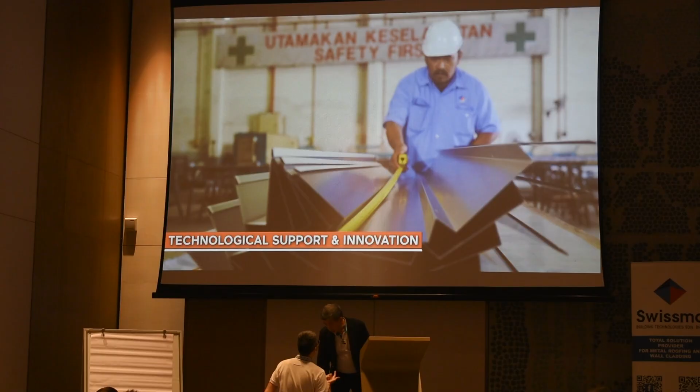In the still rapidly developing nation, new buildings sprout each day as a sign of advancement of society, both in technology and aesthetic. Swissma has been leading the total solutions provider for roofing and wall cladding in Malaysia. Equipped with the highest technological support and innovation, our team put great care in our work. Aiming for total customer satisfaction by advanced research and fulfilling the needs of our clients, Swissma guarantees everlasting returns for stakeholders, while also providing precision manufacturing along with customized fabrication, creating endless possibilities.

Our services include on-site production, providing installation training, craftsmanship quality, engineering and R&D, technical and architectural consultation, receiving multiple award-winning titles such as the Brand Laureate Best Brands Award 2015-2016, Sin Chew Business Excellence Awards 2016, the Brand Laureate Best Brands Award 2016-2017, the Brand Laureate Best Brands Award 2017-2018.

Swissma offers sustainable customized solutions using different materials such as aluminium, stainless steel, copper, titanium zinc, TPO PVC membrane that is FM approved. Most importantly, working in strategic partnership with NS BlueScope Malaysia for solutions in color bonded steel. Also not limited to specialized projects being public amenities and infrastructure, commercial buildings, industrial buildings, residentials.

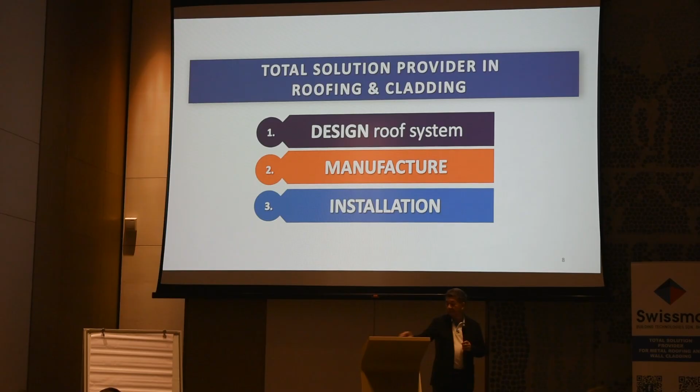Before we design the roof system, I think most importantly, we need to know the project requirements. We have to understand what the project needs. This will be one of the key elements in most projects now - the U value, the thermal insulation. Later on I will share with you the UBBL Clause 38A requirements. Previously, this doesn't take center stage, a lot of insulation was just nominal. Today, I think projects are getting more sophisticated. There are some thermal requirements that are even more stringent than the mandatory requirements.

So then again, we are able to customize the roof system to meet acoustic value. Let's say a convention center, lecture halls, hospital or whatever, where there is a specific acoustic requirement, we can customize the roof to meet the STC value. We have the software. Oops, bit of technical hiccup.

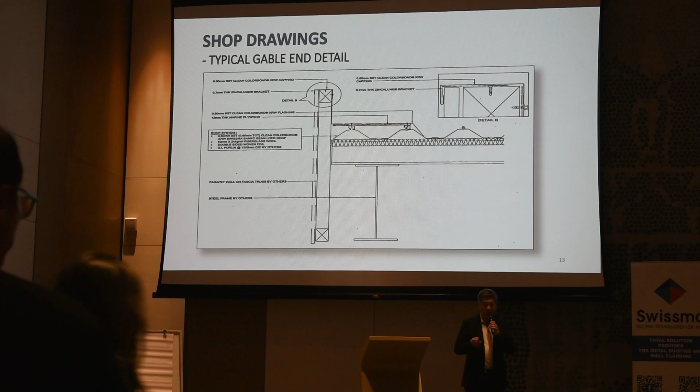This gutter downpipe sizing, we also use software to do the sizing. Then, of course, most importantly, as an architect, the shop drawings - whether the project is well executed or not, I think this is quite fundamental. If you don't provide the details, don't expect contractors to know what to do, and they'll use their own standards. When things happen, who is right, who is wrong - their practice versus your standards. But if you don't have drawings, there is no standard to refer to, unless you ask them to submit shop drawings for approval, which I do encourage, because that's where you are in control. So we can provide shop drawings.

Once we understand your project requirements, we customize the roof. Customizing the roof isn't just about the layering of components, it's also selecting the right profiles due to your project needs, maybe long length, low pitch, or a 3D geometry design.

As a company, we provide a very wide range of materials for your selection, from color-bond steel down to TPO membrane, and in between, even pure titanium. I'm still looking for a project that will be interested. Titanium zinc, yes, we have done in Penang as well.

When it comes to coated steel, we work with NS BlueScope as a strategic business partner. We only sell BlueScope coated steel. Why? Because, as you can see from the earlier slides, we sell quality solutions. I think in coated steel, BlueScope has exhibited their quality over the years, and they are also the leader in the market for coated steel.

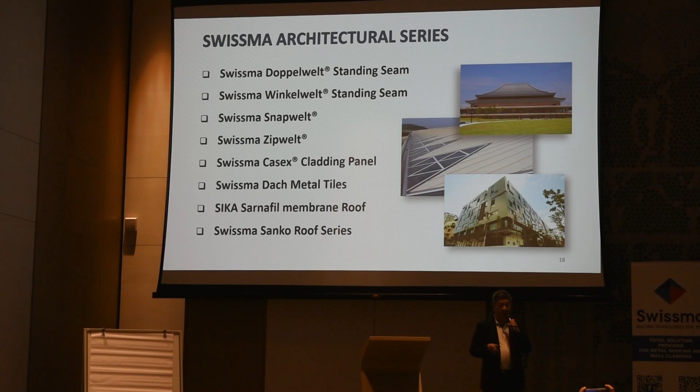As a company, we provide the widest range of products, I would say. We've separated into two categories. One we call the architectural series, where we have the Doppelwelt standing seam, Winkelwelt, Snapwelt, Zipwelt, even Casex cladding, metal tiles, membrane, and next we have our Sanko roof series.

Before I move to the Sanko series, this Doppelwelt standing seam - we are one of the pioneers to introduce this in the market. It's a very European system. Malaysia used to have metal roofing introduced from Australia in the early days, so the clip lock type roof was one of the earlier metal roofs in the market. But standing seam, we introduced it - it's a very European profile.

I always say, like in a restaurant last night, we were looking at the menu and always ask the captain, what's your signature dish? So this is our Swissma signature profile. Why? Because this is the most versatile profile - it can do all shapes. Only this profile can do all shapes, like this.

On the right hand side, that is a Penang project. That's a Penang swimming club done in titanium zinc. You can see the complexity of the design.

The other category is called the Sanko series. Sanko is a Japanese brand. Sanko Japan is our partner, so is Nippon Steel Japan. This product, Sanko, has been in Malaysia since 1974.

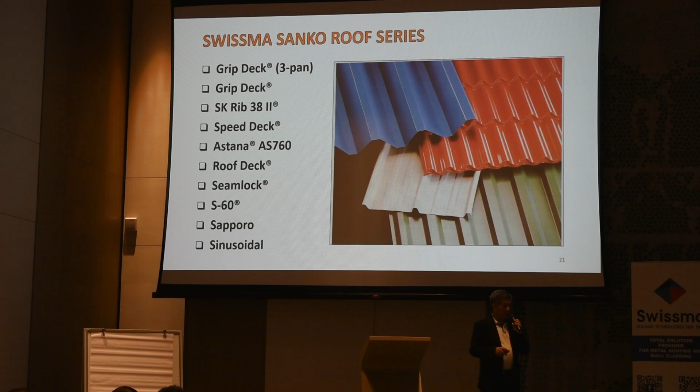And you can see there's a wide range. I will not go into all the products, I'll just mention this - the clip lock profile, which is the most sellable. We call it Grip Deck 3-pan.

Just want to touch base - this is a very Japanese system, we call it the Sanko seam lock roof. Some of the audience here has already done projects using this profile. It's a very robust, deep corrugation profile, so it can go on very low pitch. Example, even 1 degree, you can go up to 200 meters, because of the deep corrugation.

And this is a concealed fix again, widely used in Japan - a very common system because it's very good against strong wind uplift in countries like Japan. So this is how the seam lock is installed, using a motorized seamer, so it's very, very secure and completely leak-proof.

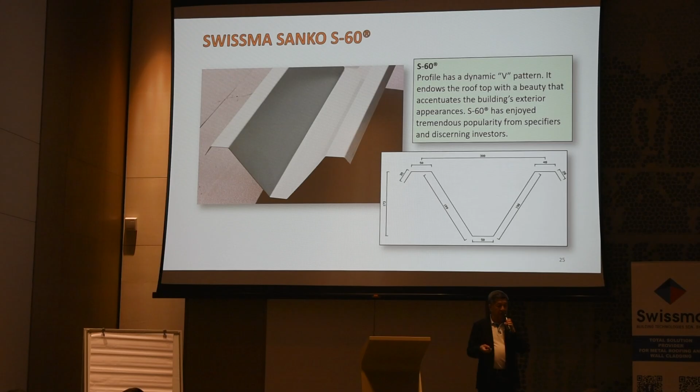We also have another very deep corrugation profile - it looks like a gutter actually. This profile's unique strength is due to its high section modulus, which is the inherent strength of the profile. It can go on a purlin spacing of even up to 11 meters, but the thickness is of course not 0.42, it's like 1mm or 1.2.

So when you have a project like this hall, for example, with no false ceiling, you don't want to see the purlins like in a factory or warehouse. Then you can design your steel structure to look very neat - so it doesn't look like a warehouse or factory. This is where it can come into play.

Lastly, I'll just showcase some of the projects we have done. I think this is a design tender we bid as a domestic subcontractor, which is using the standing seam. This is where the next highlight will be, shared by architect Ryan Tan - Sama Square, an award-winning project.

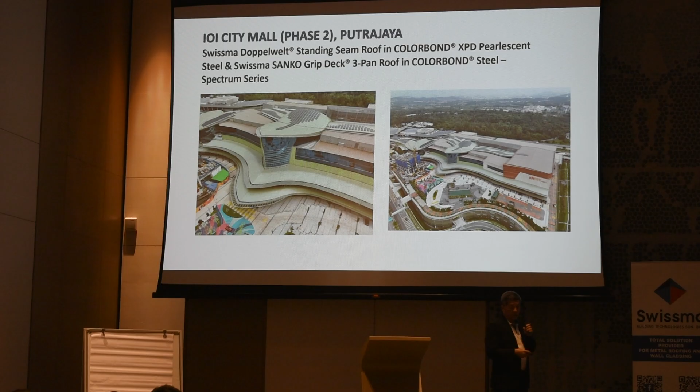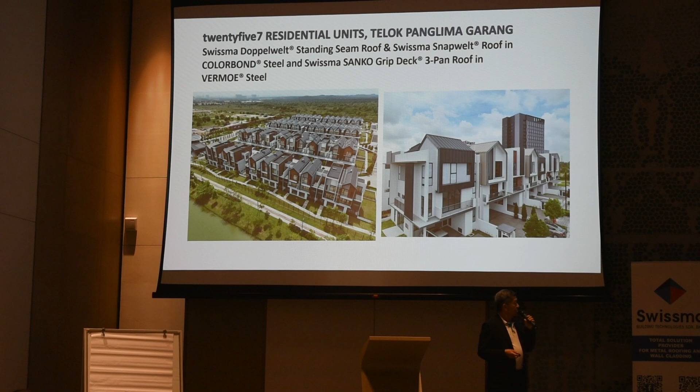This is a private bungalow - like I said, standing seam can do any geometry. So this is another modern bungalow. Mass housing in standing seam. Again, some other images - the A shape of the barn house design is now very popular.

Hangar, next. The hangar project phase 2 is now on tender. This hangar - when you see hangar it means very wide span, very long length. So this is the C-block profile that was completed.

This is Ferrotech, home base here. This was also challenging in the sense that it was very fast track in nature. But it's completed.

This is another project by Sime Darby, now they've sold it to Seming. Now in KL it's very popular to build multi-story warehouses, and I think that will come to the next state as well. Sime Darby is very into it. This is Logos, the warehouse - it's 40, 50, up to 60 meters tall, multi-story.

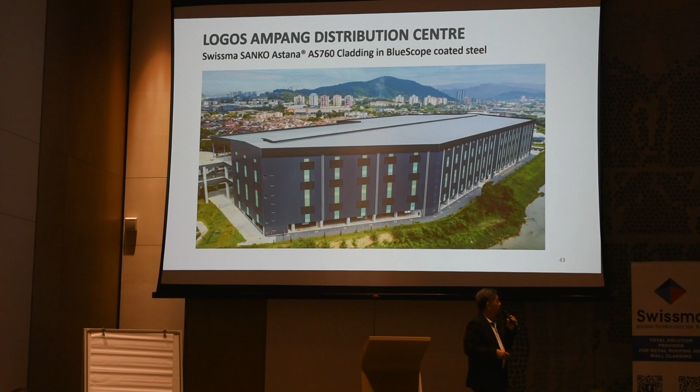So this is another typical factory with a lot of skylights. Again, this was the first Logos warehouse in Kuala Lumpur, and currently we are supplying a lot to this kind of light industry in KL for Sime Darby.

And that's all for a brief introduction of Swissma. Now I'll move on to the topic for this morning.

Okay, the content: I'll be sharing with you some customized cladding system to meet UBBL Clause 38A. I'm sure all of you are already doing project compliance because it's mandatory. What I'm going to share is the construction method, and how, just to give you some basic knowledge, you can develop your system to meet the U value. Then I'll be sharing on oil canning, something you're familiar with, and flashing, detailing, and use of proper tools. And lastly, customized shop drawings, sharing some nice shop drawings.

Okay, let's move on. UBBL Clause 38A - it started with MS 1525, alright? I think Penang State was always very advanced compared to other states. When it was at 1525, I think the Penang State government already adopted the U value, though that was not mandatory then. Before 2680 came out for residential, and of course now it has evolved and been adopted in UBBL, which becomes mandatory throughout the country.

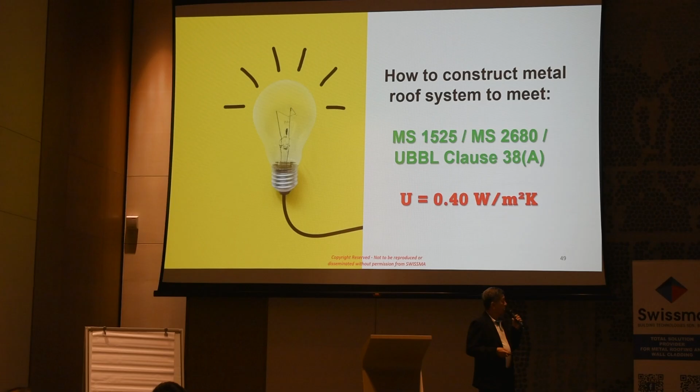So this is an extract of the UBBL Clause 38A, which I'm sure you're all familiar with, and actually it's a very simple calculation. I'm just sharing - it sounds like a big deal, U value, but if you break it down, this is a simple formula. So K is thermal conductivity. Again, loose connection, sorry for that.

Yeah, so just quick sharing - you can also sometimes do your own checking. So K is thermal conductivity, which is a material property, which I'll show you. The thermal resistance R value is actually the material thickness over K, and the U value that you're supposed to comply with, which is the thermal transmittance, is 1 over R. The higher the R, the lower the U, okay?

So this example of the K value - this is fiberglass wool, published in their material catalogs. For example, here is a 16 kg density, 50 mm thick, shown there. So the K value is 0.0366. That's the value you plug in when you do your calculation. Next, that's the rock wool - the value is quite similar, right?

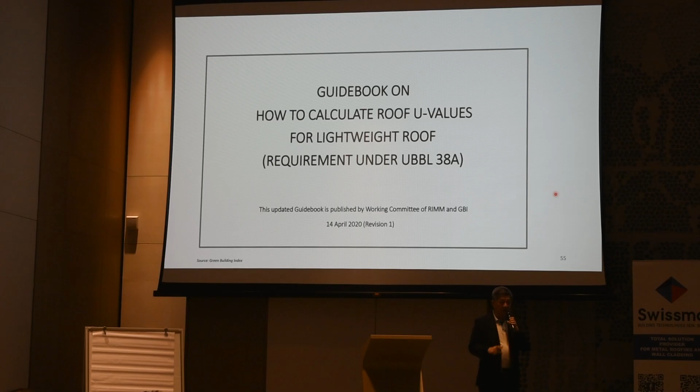So this is a guidebook developed jointly with RIMM and GBI. Before this, it was a real challenge to come up with calculations other than the fundamentals using pure thickness of insulation. Today, we all refer to this guidebook.

Here you can see there's a table for enclosed airspace. Everyone knows that air is a good insulator, but before this, nobody knew how to assign a value. We can assign value based on research data from a professor in the US, but it's not easy to get people to recognize. Today, we are very happy there's a publication you can refer to. Next, yeah, this is another table.

This is also from the same publication, attic space, right? We all know attic space will contribute towards your thermal value. So now there is a value that you can assign.

This is based on AS NZS 4859 standards. Previously, most of the calculation used the non-reflective column for aluminium foil, where the value for horizontal is only 0.16. Today, if you do the right specification and ensure the installation is correct, you can move up the value to 0.8. So this is very important.

To adopt 0.8, you must specify the right type of foil and also the installation, because aluminium foil - I'm not sure whether you are aware - when you say double-sided aluminium foil, it doesn't mean both sides are laminated with aluminium. Do you know that? It's only one side metallized, one side aluminium. So their performance is different.

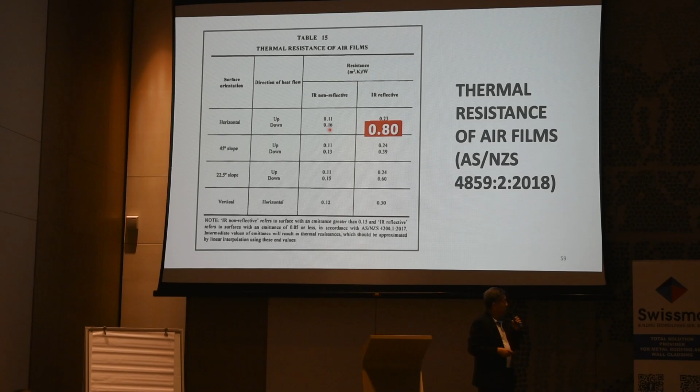Next, so in this case, we use the 0.8, right? You can see the rock wool, compressed from 75mm typical thickness available, compressed to 65, only 65mm thick. With the foil facing down, using 0.8, you can achieve the U value. If I use the R of 0.16, which we used to adopt previously, you have to use a thicker wool, 100 compressed to 85, minimum 85.

So here again, I just want to share - previously there was a lot of confusion. You all use bubble foil, any of you? Bubble foil - I'm not running down the product, I'm just sharing technical information. They thought bubble foil does magic - no need rock wool, no need whatever, thick bubble foil can meet the U value.

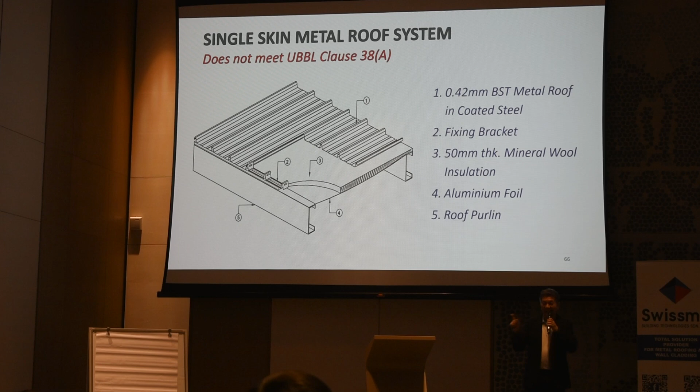Sudah cukup, those days. I have to unlearn those things to learn new things, because in those days aluminium foil was pitched as a radiant barrier. You see, it reflects heat. So why do you need insulation? It already reflects 90% of the heat, right?

So it's not true. For the foil to achieve the thermal resistance, you must have an air gap. That's the bubble foil test that proves that value, tested. So this one definitely won't meet compliance.

So now, in the early days, we proposed this system: 100mm compressed to 85. Like I said earlier, because we are not assured that the foil is installed the way it's supposed to be, this will be the safest approach. You need 85mm. You need 85, cukup makan 0.39 U value.

It can be lower than 0.4 but not more. So this one is cukup makan 85. If you bring it down to 75 or 80, you can't meet it. So in the market there is no 85mm thick wool, there's only 100, so we use 100 to compress.

But then again, we also intentionally pick a system where there is compression. You know why? The compression of the wool against your metal deck is very important as well, because metal deck most of the time has got two major concerns, right? What are the two big concerns when it comes to metal roof? Heat, right, always heat. And next...

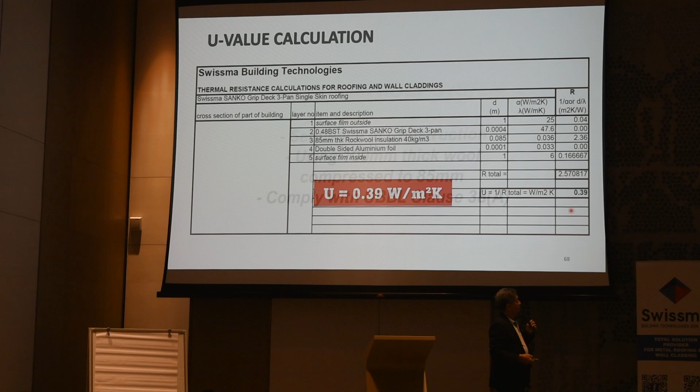So here, quick sharing on how you construct. Most of the time you see the theory, right? So on site, how do you actually construct the roof to meet the U value? That's what I'm trying to share.

So here, quick one: the roof purlins, BRC mesh, optional, right? Nowadays, again due to budget, the mesh is taken away. But here, even if you need a mesh, we recommend BRC mesh, not just for flooring. Why? The days of chicken mesh, to me, are over. Those days it was compulsory to use chicken wire mesh, because the technology has changed.

Last time, aluminium foil was made from sisal kraft paper. It does not have strength, you need the mesh. Chicken mesh should be at the chicken coop, because it's very low quality, okay? Low quality, not even fit for a fighting cock, let alone your normal chicken, because it rusts very quickly.

So this is optional, and then you have your foil. Then you put this, this is a new thing to comply with the UBBL. You need this component, later I'll share other ways. So here, Swissma, we like to have a hybrid system of top hat. Come see, okay, what's the function of this? Okay, after this, then you lay your insulation.

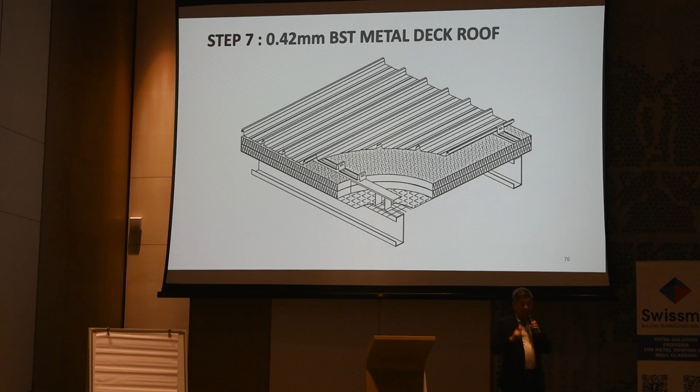So the double skin roof system is basically the same, except your bottom layer, instead of foil, is your metal deck. I strongly recommend this kind of roof system because you don't want the chicken wire mesh, the BRC, or the fiberglass insulation visible. This liner deck will act as a seal and also prevent your insulation from falling off over time, especially when exposed to weather.

So it's the same, except the first layer is just a metal deck, and this is good for construction because doing so many layers takes time. An under-liner is very fast; you can fix it once the liner is done. You stay weather tight, and you can do concurrent work, internal and external. So it's the same.

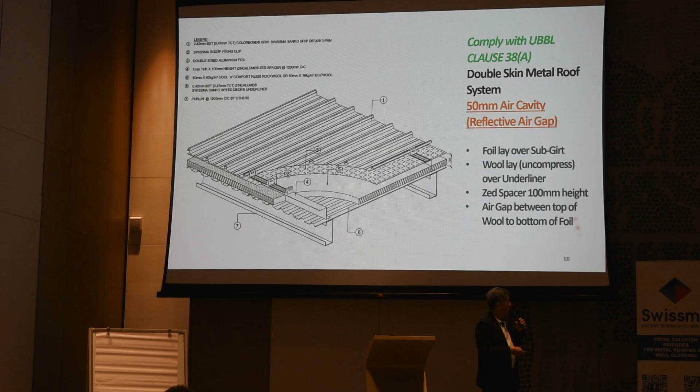If I don't face the aluminum down, although there's an aluminum foil, it doesn't apply the R value. And if I don't have the aluminum foil at all, just the air cavity, it's called a non-reflective airspace. The value is only about 0.1, very low. So there is reflective and non-reflective airspace.

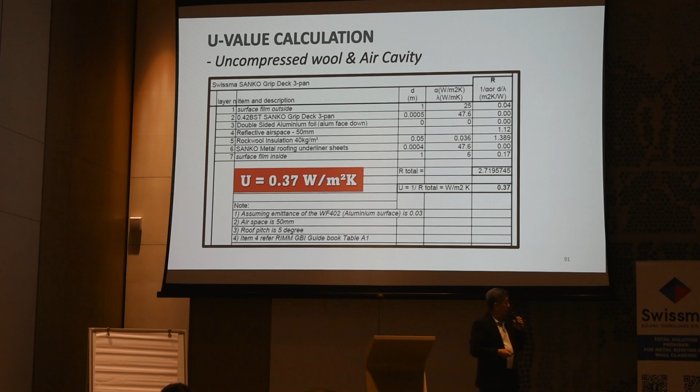Now in this hall, for example, in any building, residential or commercial, if you have a false ceiling, like I said, making use of the attic space from the ceiling space helps optimize cost. So there is another system, and you only need 50 mm wool.

I want to emphasize again that a system with uncompressed wool will be a holistic solution because you will also address rain noise. If it's a big warehouse where nobody's working, rain or shine, it's okay, fine. But if it's a meeting room, where acoustics are very important, make sure you have a system that doesn't compress.

Sometimes we are all driven by budget, especially when the design goes to the QS and comes to us. We know what to do. Every time we go for the best, the budget isn't there, so out it goes. We have to compromise between budget and performance. The architect plays the role of governing performance. Don't blame the QS, they govern budget. You are the one who has to explain and create the budget. That's my take.

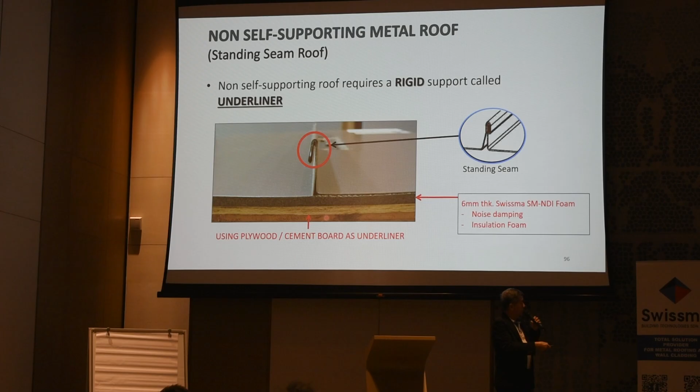The standing seam roof has substrates. You can use solid plywood, cement board, or metal deck. Metal deck is the best choice because plywood has a concern for termites, and cement board doesn't have much structural strength and also has very poor pull-out strength. Between a 12 mm ply versus a 12 mm cement board, which is better?

Acoustic-wise, cement board is better because of its density, 1390 kg density, while plywood is only about 600. But then again, the pull-out strength is what you have to consider. I've seen projects specified with 9-12mm cement board, and then fixed on top of it. The pull-out strength is very poor, and you've got a concern about wind uplift.

That's why today, not surprisingly, under strong wind, some roofs will give way, either due to poor design, poor workmanship, or other reasons. One of the avoidable reasons is don't do something like that.

So let me show you quickly. Everything is the same, except here: here you put your clip system straight away, but here you put the metal deck or plywood or whatever. This is your support for the standing seam. That's the difference, and the standing seam construction method, I will not go into detail.

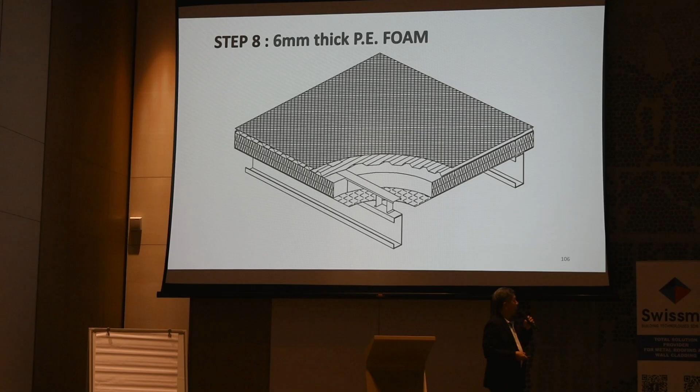We have a noise damping foam again. In our system, we always consider noise damping as well. Then you have your standing seam. So that's the difference. Now, having said that, I'm also concerned.

If you want that system, you can, but you must use incompressible wool. We have done projects like the Sabah KK Airport, where we value-designed the whole system very straightforwardly using Hardrock, 175 kg density of wool. You can stand on it.

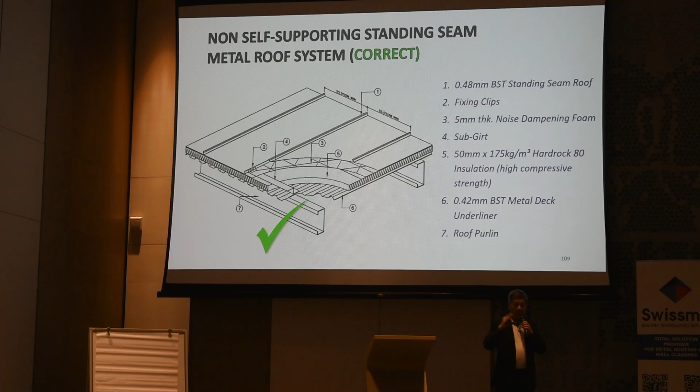It's the insulation used for membrane roofs. Membrane is like cloth, right? So you can install membrane over Hardrock. Now, if you don't - this is a live project, right? A live project.

The specs from our customer told us that you can actually do what I mentioned earlier, and we said no. They weren't convinced because a lot of others have done it this way, but let me show you why it cannot be done. Below that is normal density wool, also rubber foam and foam. Well, there is no rigid support, so it's like a water bed.

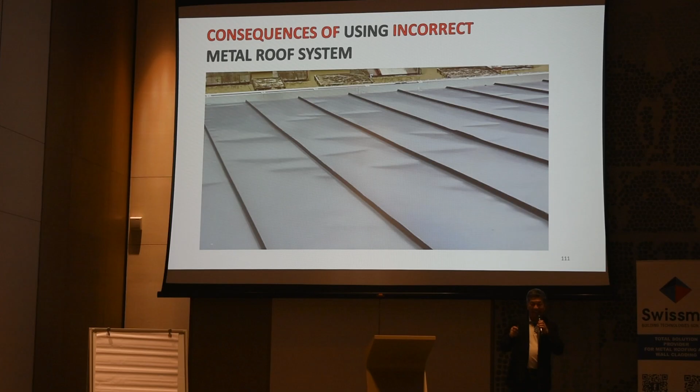So I mentioned we've got our hybrid top hat combined with C. There is the Z spacer, the most commonly used Z spacer. Why? Again, we are hard pressed for price competitiveness - Z uses the least material, so it's the cheapest. I won't say it cannot be used, but the installer must be skilled. The minute you get your first few pieces properly aligned and installed, it ties up.

The main weakness is stability, as you can see. So if you carefully install your first few pieces and tie it up, then it becomes stable and you can do your job. But if you don't do that job well, if the Z were to topple, it impacts your installation.

So then again, a stable profile would be a top hat, very stable. Then you can see the utilization of material, so the cost is higher. That's why we innovate, we do a hybrid. Maybe next will be EV - we haven't come to that, we're still a hybrid. So we combine the top hat with the channel, because with this your stand is stable, you avoid the instability of the Z.

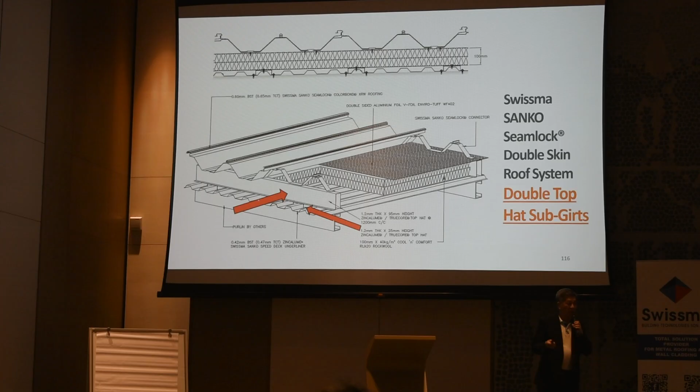And if you are talking about a project that has serious calculation or compliance requirements, like an FM approved project, then this is the most stable form of construction - a double top hat. A top hat that secures itself directly to the building as a support, then on top is your actual top hat. This is the most stable and strongest construction method. For a normal project, I could hardly find budget for this, to be honest, but this would be the preferred option.

I share this because it's become a hot topic in Klang Valley. Now a lot of shop lots are using lightweight truss - lightweight truss has become the new thing.

Lightweight truss has got one problem installing the Z spacer, because the batten is very narrow - as narrow as 30, 25. So when you put a Z, it's very unstable. Worse still, the batten is very thin, not like purlin's 1.62 mm - I've even seen 0.40. So when you step on it, the screw also gets loose. That's the biggest challenge.

But honestly, if you want to use that, you still can. You've got to specify the width of your top hat to be at least minimum 40. Then you have stability, and also enhance the thickness.

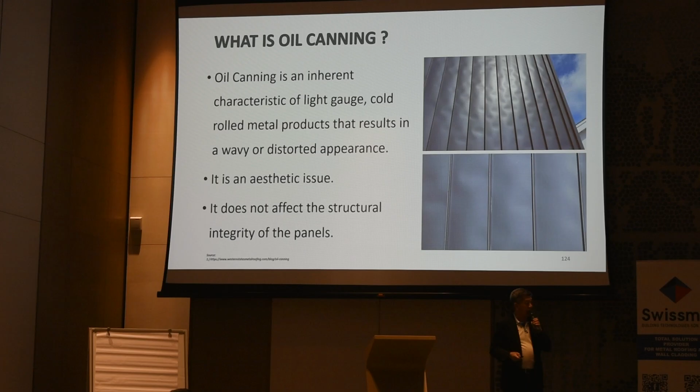Now, what can impact oil canning or accentuate it? For example, thermal expansion - let's say standing seam, I'll share later, even for standing seam, the seaming. All these contribute towards it - material thickness is the easiest to address. A thicker material will have less oil canning.

This is what I'm talking about - you've got sliding clips and fixed clips. If it's a roof that's very long and somehow they end up cutting costs using all fixed clips, when it tries to expand and contract, it will buckle there, contributing to oil canning and accentuating it.

So for standing seam, normally for facade wall cladding, we recommend using Winkelwelt instead of Doppelwelt. This is strong enough. Why? Because the more you work on the roof, the more it's subject to stress.

It's not easy to follow, honestly - you need a very experienced guy. I always say, give the same recipe for char kway teow to everyone, right? Nobody can beat the guy in Lorong Selamat, because it's his expertise. Same here, nothing beats experience. So when you evaluate a contractor, make sure they can prove to you they have done projects, and they also use the same contractors.

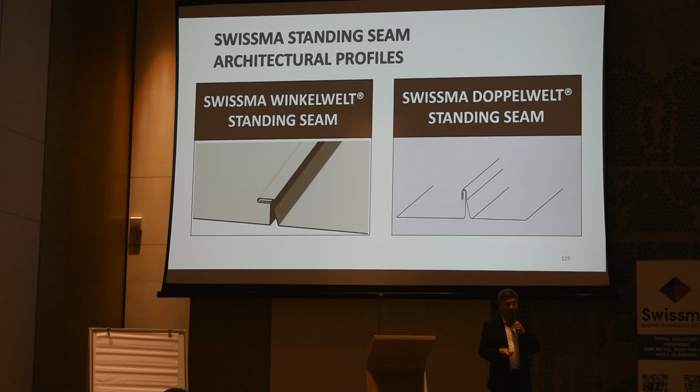Other factors include uneven or absent substrate - you need support for product extension. Workmanship is also one of the biggest factors. If the workmanship is no good, even simple screwing can cause distortion and induce stress. It's all about stresses - human beings get stress, products also get stressed.

A flat surface, of course, the wider the flat surface, the more likely to have oil canning. There's also an inherent manufacturing stress from the coil itself through the roll forming process.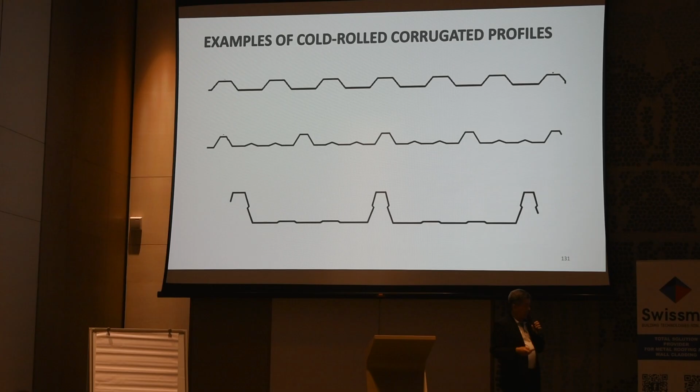So the way to go about this is to select a reputable supplier or manufacturer. You can see here, this is what I call a very white flat surface, and you don't have a lot of issues with oil canning on this profile. Why? Because the flat surface is very limited. But if you take this and extend it wider without applying this, you'll also get that oil canning effect. That's what I meant.

Now, how to minimize oil canning? Of course, as I mentioned earlier, the thicker the material, the better.

A matte finish has a visual effect - something glossy, you see oil canning very obviously. Color choice also matters - lighter colors tend to have less visual impact on oil canning.

Also, time of day matters. I've had customers say, 'wow, very serious oil canning,' but the next day without the sun it looks okay. So it's alive - on a hot day it expands, there's thermal movement, it will happen. There's nothing much you can control except allow for thermal expansion.

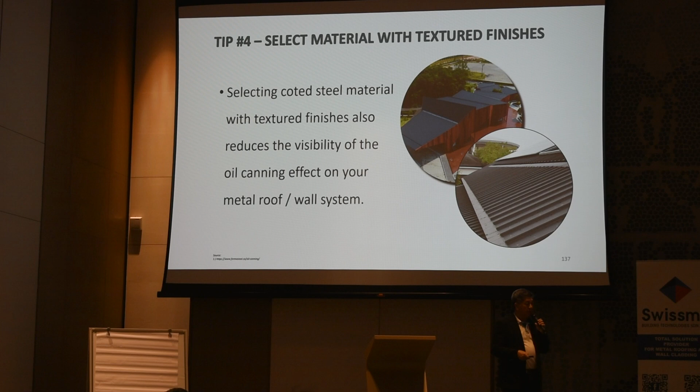A textured surface tends to diffuse the reflection. Like I said earlier, a narrower panel width helps. Of course, for the normal clip lock profile you can add mini ribs or striation.

But for a standing seam profile, adding this component spoils the aesthetic - that's why we call it an architectural profile. Imagine a standing seam with all that added - it looks like a clip lock profile, no difference, you lose your appeal. You address the oil canning, but you lose your appeal.

Oil canning has to be addressed through education. If the client cannot accept any oil canning at all, you're in trouble - I'm in bigger trouble. Education is important. Show them images.

Everywhere overseas, in Europe, you see it. I travel with my family, and I'm always the last in the pack because I always take photographs of roofs and walls, especially to understand how they work.

Standing seam comes from Europe - in European countries it's natural, it's accepted. So this is what I mean: adding mini ribs like this makes it look like a clip lock profile, so it's no longer has the architectural appeal.

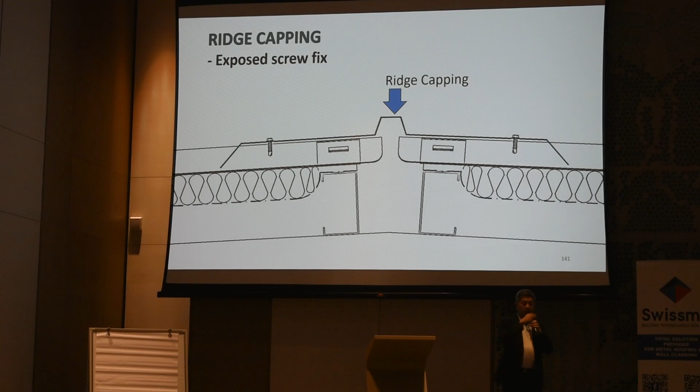Okay, covering oil canning aside, now flashing details. For the Sanko series, this becomes a standard ridge capping - you actually screw it. In this project, we even had different colors of capping to match the roof because it was multi-color.

So it's still a screw fix system, and this is standard. But you have to ask yourself - if your roof is a concealed fixed roof with a lock, that's why you wanted no screw, no puncture. But your ridge is punctured all the way, and the most important part is in the middle of the building. Can you overcome that? The answer is yes.

You can do a concealed fixed ridge capping. Even for a simple clip lock type profile, you can do a concealed fix. The only thing is you must provide the drawings to the QS to get the right budget, otherwise who is going to pay for the variation order? Because the contractor will never cost for it.

The day-to-day challenge I encounter is it's not budgeted for by the QS because it's not detailed. If the QS overlooks the detail, you can pinpoint that to the QS. But if you don't even provide it, how do you expect the QS to capture the cost? So you can do concealed fix - in all our standing seam roofs, because it commands a high premium, we never do screw fix, only concealed fix. But similarly, you can also do this for a normal deck, it's just a matter of cost. How nice, how neat, right? No worries.

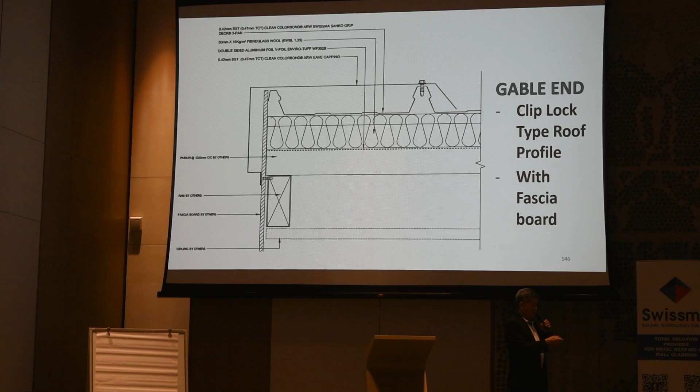This is the fascia board, and if there's no fascia board, you can use the flashing as your fascia, like in this case. So there's no fascia board, and we take it all the way down to your soffit member and have your ceiling. We can do a bit of

anti-capillary drip there, just like this standing seam. The beauty of standing seam is you can see, you don't have a flashing covering at all. This is just a vast difference in detailing.

This is a typical profile, and for the standing seam, you can see standing seam actually has a fold back, and the flashing is also double fold. You can have a cornice design, whatever, depending. Again, this oil canning is a concern.

Having shown that, you say okay I apply this, and then you have 400, then you're in trouble because of flat surface oil canning. So you can actually break that flatness using this kind of treatment, right? So you strengthen the profile, you reduce the flat surface, and this becomes aesthetic, like a cornice design.

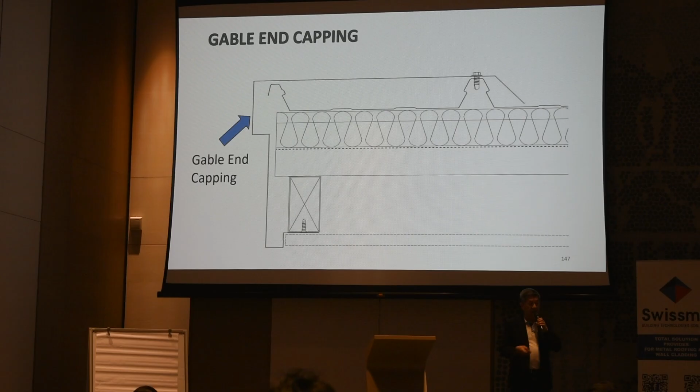So here you see the typical corrugated profile, this is the top. Now a lot of mono pitch roofs, right, one slope, there's no ridge capping. So what you get, you have to cover your flashing over your profile. This is typical, but when it comes to standing seam, it's different.

Both sides can be the same detail, and the side gable end also. So all the flashing is below the roof. You get a very nice treatment all around, regular. The normal profile, because of the cap over, must come below at the eave, you get a very different outcome. So if you want a nice bungalow with this kind of effect, standing seam is the best.

So again, these are flashings you cannot avoid. What I see commonly specified is cut groove, most standard practice cut groove. Cut groove is sealed, right? You all do this? If you don't specify, also by default.

But I've done a project as a subcontractor. I've seen the worst kind of workmanship, and from there it sort of drew me to say this might not be the best approach. This approach depends very much on your brick wall plastering works. I have a project, a light industry.

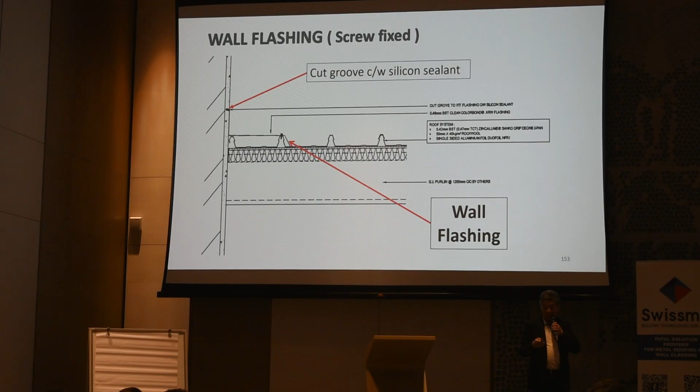So it was perfect before, two months later, it's weeping. So what you get after many years of complaint, the silicone is so thick it's unrecognizable already, it's so thick. So that is a common problem.

Now with this, it can move, but you've got your upper flashing that is independent. So if you want the best secure flashing, I would recommend this.

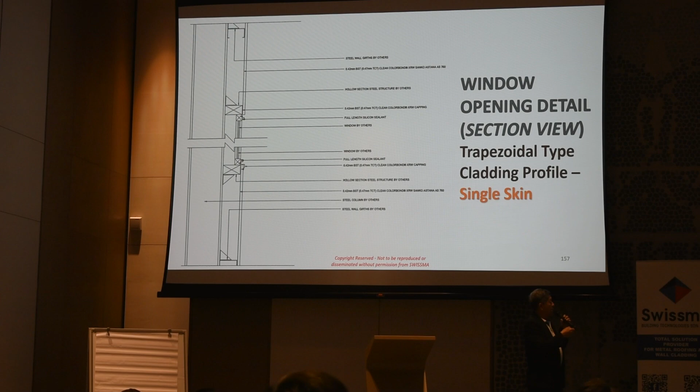These are a lot of louvers. There are so many possibilities, it's difficult for me to say it's typical, right, a window. Again, today, even in warehouses in KL, we've got double skin cladding, insulated double skin, single skin, too many variations. But whatever it is, there's always a detail that can be derived.

If you don't specify this, then in the project, with so many skylights, this cost is not captured. VO. When I hear VO, everybody screams. Owner is not happy, blaming somebody. And QS says, oh, architect didn't draw the support.

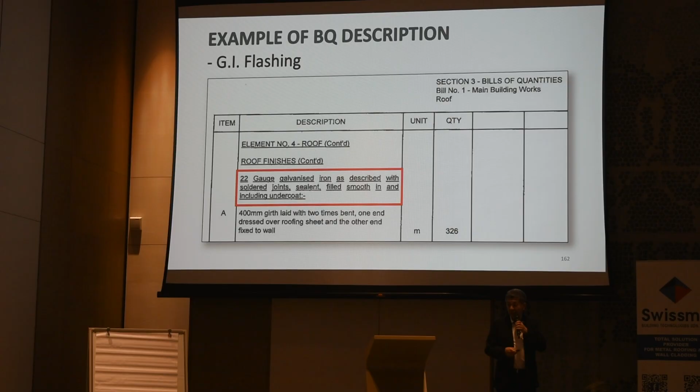But then again, there are different gauges. So why do I highlight this? Because this has become like a standard for flashing specs, always gauge number. These are all colonial times - wire gauge, yes, BRC wire gauge, yes. So you specify again GI flashing for your roof. The flashing corrodes much earlier. So what's going to happen?

And this is another one where it's a colored material. On the GI, what do you do? You put paint - wow, red jacket, brand comes out, undercoat everything. You look at your residential house - I stayed in a terrace house those days, the first to go is the party wall flashing, right? Because this is the spec, and you paint on site, there's no adherence. Would you send your car to a workshop that has got no oven? I can pay you $500 to paint your car, and you say wow, sale of the century - you just spray over it, just like what happened here. There's no adherence. You have to oven bake, right?

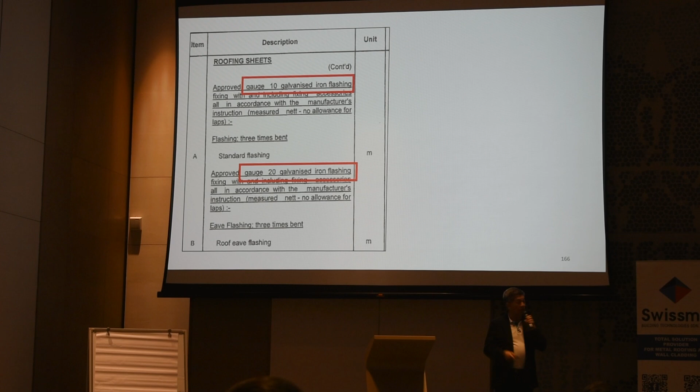So this one you get paint peeling, no adherence. Okay, here, one single project - this one very professional, very technical guy. He can even distinguish - he wants gauge 10 on this part and gauge 20 on the other part. Very sophisticated specification. His actual project, I took it out, thought it was very interesting.

Okay, two things to highlight. The thickness gauge number - of course, if you ask me gauge 10, I also don't know how thick. Right? Specifying two different thicknesses is one thing. Now, even in actual projects, as an architect, you must also be practical. I can tell you JKR in the early days, many years ago, I think the Bandaraya did a good job. He summoned the industry players and said, how come all my projects came back with different thickness proposals? We specified the thickness, but the thickness specified is obsolete already, not even in the market. So people offer what is in the market, so you never meet, and it's non-compliance, so always go back to HQ.

So then they update. Okay, the next big thing is your roof, especially not so big a project. You specify your flashing thicker than your roof, and the flashing quantity is very small, of a certain color. I'm a manufacturer - you ask me to order a minimum quantity of 10 tons to supply 500 kg.

It doesn't make business sense, you know what I mean? These are the commercial challenges. You can specify, but the contractor puts something very different, and tells you there's not enough quantity. Then the manufacturer gets blamed as useless. But it's not like that - we are in business. You ask me to order 10 tons of a certain color to supply 1 ton for the flashing, whereas the roof is another material. Very challenging, right? I might lose money for that project. So it can be addressed.

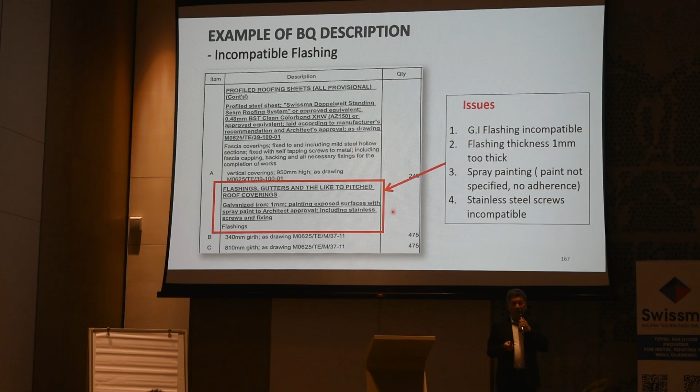So, just a quick sharing, the difference between GI and bluescope material. That's why we opt to work with them as a strategic partner. And I think, quick sharing, a lot of you might not have the knowledge. You see GI all the way, right? But that is not telling the full story.

So, simplified roof, flashing, same material, same thickness. That will be preferred for me as a manufacturer and for you to manage a contract like this.

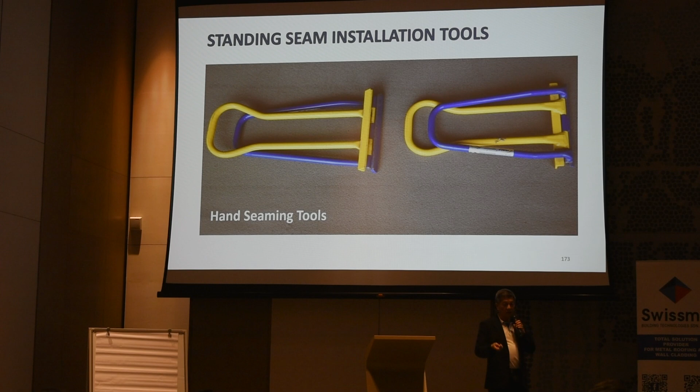Okay, now correct tools, just to touch base on standing seam - you must have the right seaming tools. In the early days, I've seen a project where he used, I don't know how, he must be very genius, I think he used pliers or whatever to go and seam. The outcome is horrendous and not acceptable. You must have the right tools. You go to a dentist without the right tools, will you allow him to extract your tooth? No way. This little thing is very important.

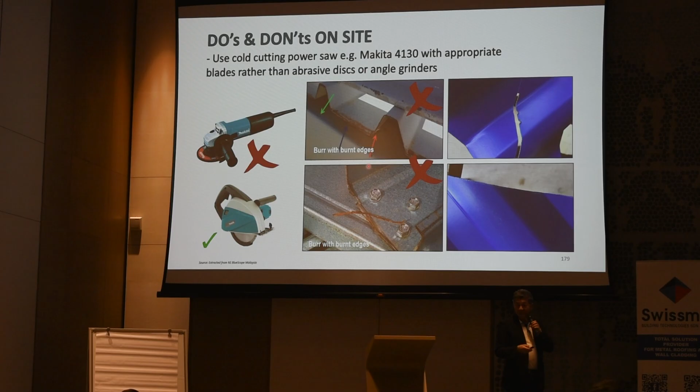Okay, last customized details. I'm sharing a couple of projects. One was very challenging - the owner didn't want to use that at first. He said click profile could do one thing. I said this type of geometry, there's no way click profile can work. It's impossible. The rest maybe you can, but then the aesthetic is very different.

So eventually all standing seam, except for certain buildings like the cinema roof where it's concealed, hidden nicely. Yes, you can save some cost using the click profile, only standing seam. But the absolute challenge is this water flowing down this way and this way. So when you have an interruption to the flow, that's where you have potential long-term leakage issues, most difficult to treat. For example, the skylight is raised.

So for all this, we need the skylight provider's subframe details to understand how we can handle it. This was conceptual. So this side is easy, but coming on the top side, again is easy because the interruption is here - water flow and then got interrupted.

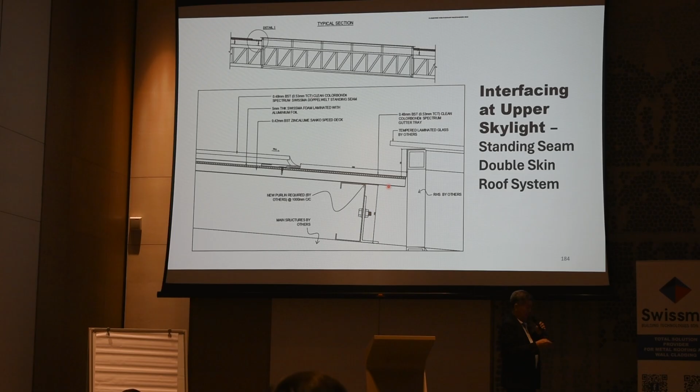So last sharing is Sama Square, just some snapshots. For Ryan to do this project, we also worked closely and it was absolutely challenging. I don't mind sharing - when my guys came back and said wow, so many colors, my first concern is MOQ. There are 5 colors, all less than MOQ. Wow, this is not going to be a good business deal.

I'm going to keep so much stock at the end of the project, and special color is difficult to dispose of. I mean the gray color is common now. So just, but we managed it. I think Ryan through the project also learned a lot of things that I mentioned earlier - as an architect, you also must know reality, being practical.

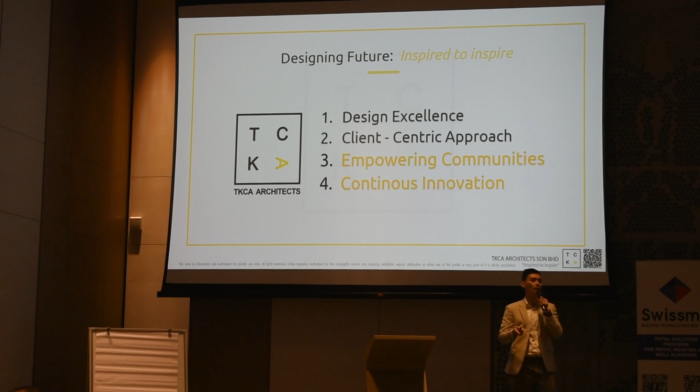One of the key things we always believe is empowering community, which we successfully showcased in Sama Square. And the next thing, which I believe everyone has to really take on - like what Mr. Long mentioned - you have to unlearn and relearn, which is very important for innovation and technology.

We are Malaysian, we are proud Malaysian. Malaysia is truly Asia where you have multiple cultures, people from different backgrounds, people from different ethnicities. So how does it shape us?

For us, Sama Square, why do we call it Sama? I'm sure all of you here know what Sama means. Sama means bersama, Sama means together. So for this project, we derive the concept from the site, or even from the country itself, which is Malaysian - Malay and Chinese, Indian, Muslim, like all of you here who are sitting here. How does it make us different is the unity that brings us together.

Sama Square is located at Setapak, as you can see on this master plan. It is the only commercial land in this particular lot. So it's a very significant and very important place for people to hang around.

Now, when we got this design brief, we were just thinking how can we make this commercial area more interactive, more community driven, able to give back to the community. We have never heard of this term until now. If you guys really realize, a lot of developers started to do this, which they call place making. So place making is a lot of things that people started to do - they want to create public space, they want to create a place for people to hang around. And this is the thing that we have been doing, not intentionally, but through this project, Sama Square.

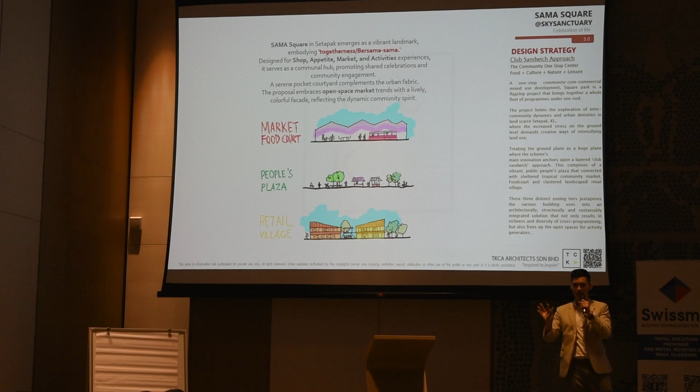That is why we proposed to our client, why not do something different? We do a market food court hall, totally open, ventilated, no aircon. I can sell char kway teow or Hokkien mee for 15 or 10 ringgit, maybe not 7 ringgit like in Penang. So locals can still come and spend in the market hall.

Now, youngsters and students want a hipster cafe, they want aircon, it's very hot. Then they can go to the retail village. So we can target two different types of crowds, yet the whole commercial area can still sustain.

Now what about people who live nearby? They don't like to just go there every day to shop and eat. What do they need? Then we thought, why not propose a park, open to the public? That's why we introduce a people plaza and a park, so anyone can come into Sama Square anytime because it's an open park, encouraging people to hang around this area.

So what we tell our clients is, don't maximize the buildable area, to QS, to architect, or even to the developer. Don't maximize it. Why? When you maximize it, you need to think of ROI, return on investment, and your cost keeps increasing. So by bringing down the GFA, we are giving back the area to the community.

How does that help convince my developer? What we tell them is, imagine day 1 you pass through Sama Square, you don't eat. Day 2 you don't eat. How about after 1 week or 1 month? You will pass by everything and think, this restaurant I've seen this time already, okay, it's my time to try.

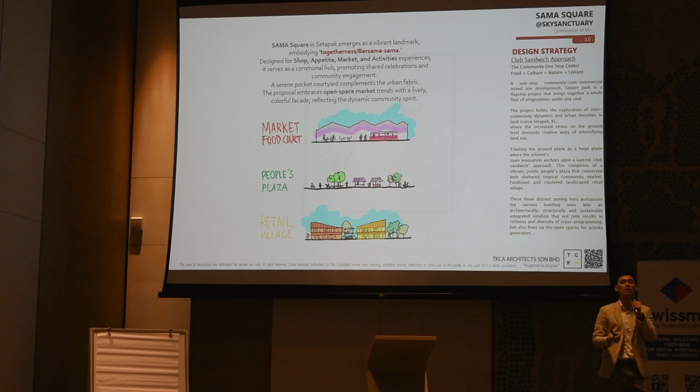So it's a kind of long-term investment for our client to think about how a brand strategist can put into the mind of design through circulation. By giving back to the community, you're giving them more space to hang around and generate income in future. It helps bring brand awareness to the user that this space is not just another shopping mall, but a community space where I can bring my family and friends to hang around.

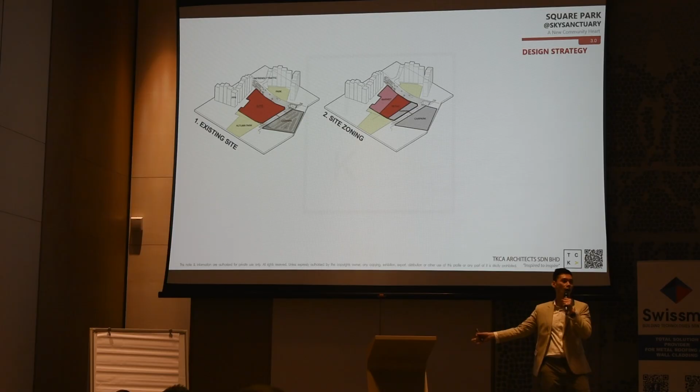We see the opportunity of another park in front, which belongs to the PPR. With this kind of land, we then tell our client, being in Malaysia, even for me, I don't want to park very far away or have multi-level parking. I want to park and just walk into the shop. So we tell our client, you have a lot of land, why not use one piece of your land opposite, outside, to be a temporary parking area. That's why you can see there's an open parking area here.

This parking area may be sufficient, but when I have a retail village or shop houses, people definitely want to park right in front of the shop so they can walk down. So we introduce another street parking in front of the shop, which is a little more premium, you just need to pay touch and go. So the whole site is divided into 3 parts: the market hall, the retail area, and the parking area.

We then further break down the space into 2 parts. Why? Because whenever you do a commercial development, visibility is very important. When you want to rent a place or do a restaurant, you always think, I want people to see my shop and things like that.

And that is why we then divided the shop into 2 parts, so that they can see the visibility from the main road. Since I have an L-shaped road, that will be our main frontage.

We further introduce a linear vista, a linear plaza that can connect the park here to the park here, so we are bringing people to our development. Whether they spend money or not is not important for now. As long as they come in, we want the chi, we want the energy. We want people to come to this development, and that is why we introduce a linear plaza here and here.

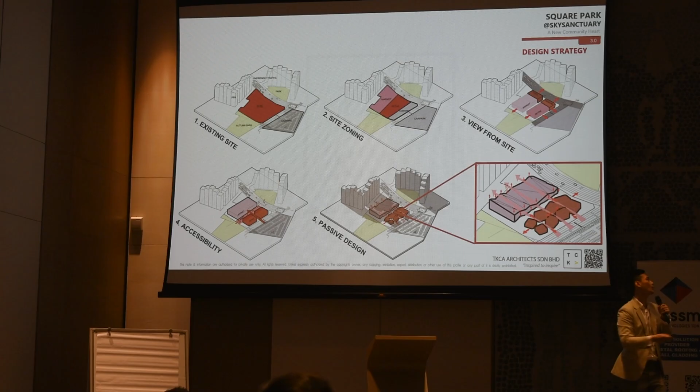So every time, people who stay nearby and want to go to the park will definitely pass by this. We somehow make them have to pass by our commercial development. So in the longer run, whether they are shopping or eating there or not is not important anymore, because people will still come in by hook or by crook.

The last thing as a Malaysian architect, as a Malaysian designer, that you have to do is always passive design, east, west orientation, all that. I have purposely oriented the building east and west because of the visibility and the frontage issue, but we are very lucky.

Because my west side, you see here, this is west. I have a big block of building helping me to create a shade, so then we are able to create a shade for our entire development. So that is how the whole design works from the beginning until the form making.

Instead of doing a building that is very linear and organized like a shop house, we purposely tilt the building. One reason is because we want to create more opening, more market garden. Second is because we wanted this space to be more funky.

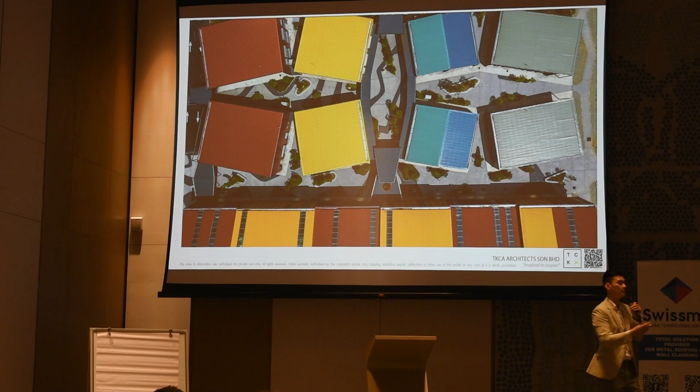Instead of having a service corridor, we make it like a service garden. When you design a shop area or commercial area, you always need to have a service lane, service corridor. By having this design, I have the frontage all in front, and the middle part is our service corridor. It doesn't become a corridor or back of the house anymore, it becomes part of the gardens that people will still pass by. They won't feel like they don't want to go here because it's very dirty.

This is the front elevation where you have a see-through. You will drive in and do a drop-off. So this is the main drop-off for our retail village.

Now, just now we mentioned we have a market behind. So the main reason why we punch through this area is because we want people to have visibility. Even though the market is very far behind, you will still see a glimpse of the building behind.

So it will then bring you to the market here later on. By having a design like this, we not only emphasize our concept through celebration, we are helping our client identify potential tenants, because this is not for sales, it's like a shopping mall, so we need to find tenants. When we completed this design proposal, our client already had 50% of tenants.

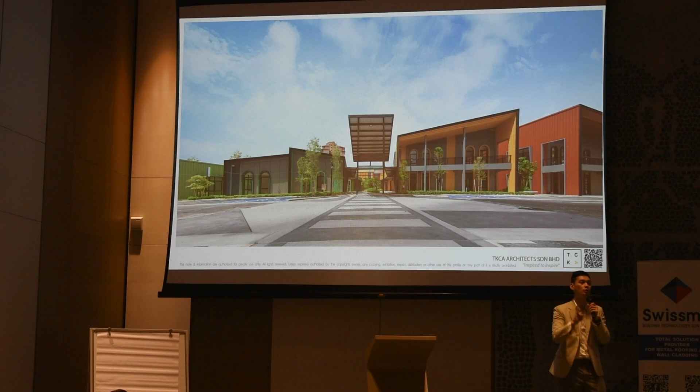Why? Everyone knows, if you're here, I think here got inside scoop, right? Inside Scoop is yellow color with juice blue color, things like that. There's Mixue, red color. So all these brands with their relevant colors automatically come in after they know this project. They don't need to paint the wall anymore like the shop house because I already painted for them, so they are able to choose the color based on the proposal given to them. That is one good thing when we design this building according to the color and the concept that we wanted.

This is the layout that we mentioned earlier. We have the open parking right next to it, connected to our main development. We have the linear plaza that brings people from the PPR all the way in.

Another reason we introduced the linear plaza is that it's a trend now for people to love going to markets - we have a lot of hipster markets, temporary pop-up markets. So this linear plaza becomes a temporary pop-up market where we can have different events and activities happening.

The second part here would be the main drop-off area. They will drop off, go through this courtyard garden, and then see our market square. The market square has three main building programs.

By having all these pretty spaces, as architect and designer, services are very important. So we purposely designed the services tucked away on the corner, so they have different access. As a visitor, you don't see the back of house anymore because it's tucked behind here - you don't go through the front part.

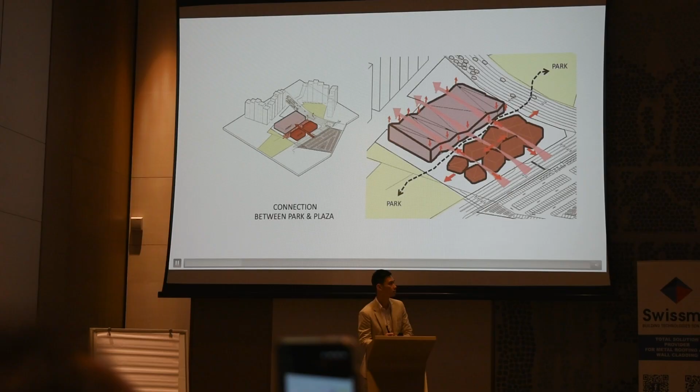Instead of conventional linear retail rows, we tilted the units to carve out courtyards and meeting spaces. These spaces encourage people to pause, interact, and enjoy greenery along their journey. By weaving nature and social nodes into the circulation, the retail village becomes more than a shopping street - it transforms into a walkable, human-scale environment that fosters community connection and a sense of place.

The double-volume market hall is bright and spacious, inviting people to sit and gather freely, inside or out on the plaza. From day to night, it stays alive with crowds, making it a true heart of community. The double-volume height encourages cross-ventilation, allowing wind to flow through and cool the interior naturally. The roof and facade use polycarbonate panels that bring in daylight, brightening the hall without artificial lighting during the day. Together, these passive strategies create a comfortable environment for daily gatherings, where even festive celebrations and holiday dances can take place freely.

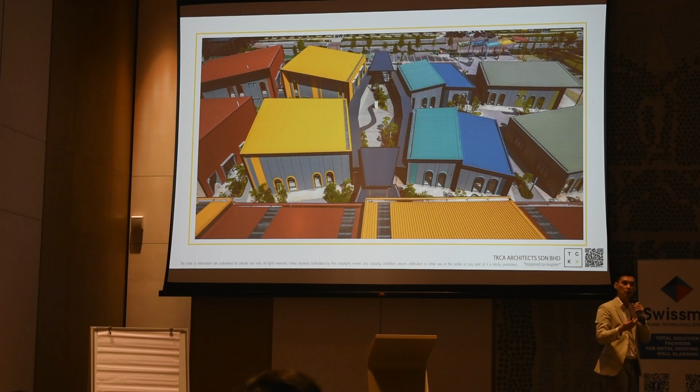Because this project was completed in 2 years' time. It was supposed to be completed in 1 year, but there was a lot of hold up during COVID. So time is also another constraint that we need to look into - whether they have ready stock or not, whether this profile is available in the region.

So that is one thing that we learn when we design with the color. So this is the color that we did also.

My contractor also blamed me because every time I issued a revised drawing, he's like, how many times do I print? Every time I print, I have to print in color, because if he prints black and white, he cannot know which color he's going to use. And we changed it so many times so that I could hit the MOQ requirement.

So I still remember when we did this project, I told the contractor, can you guys start? I started to interfere with their own program, which I shouldn't have. I was like, can you guys start with the retail first, so that I know what color is remaining for me to put at the market hall?

So this is also another issue that we need to study, because when we design, when we tender, very rarely does the contractor submit you the detailed program of which one they will start first. Or even if they do submit it, they submit only by phase.

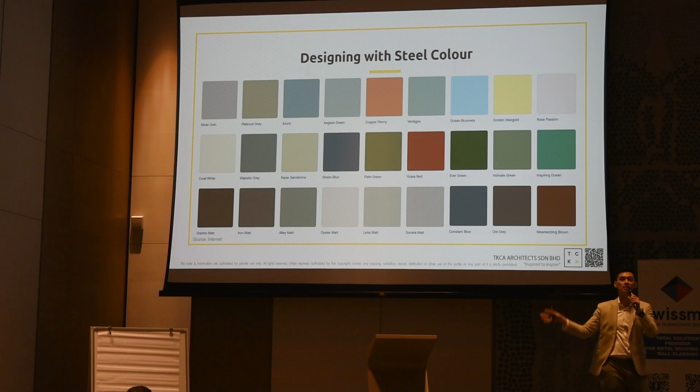So this one we need to look into because we have 2 phases, the retail and then the market. So we told them, can you do us a favor and do this one first? When I know the remaining steel color that I have, only then do I apply it to this.

Luckily, I have sufficient color and material left, and that is why I could apply some yellow color and red color into our whole building or the market roof on top. So we actually helped them to negotiate and redesign and update the drawing frequently so that it could hit our requirement.

The yellow color and the red color are only here. For information, there's another roof on top, also green and blue color, which we need to calculate from here as well. So calculation becomes our other task, to make sure this design can go concurrent with our proposal.

Also, why we have to pick all these colors is because we need to gel back to our facade. We have brick wall, we have wall, but paint is easier. They can just follow whatever color that we have chosen.

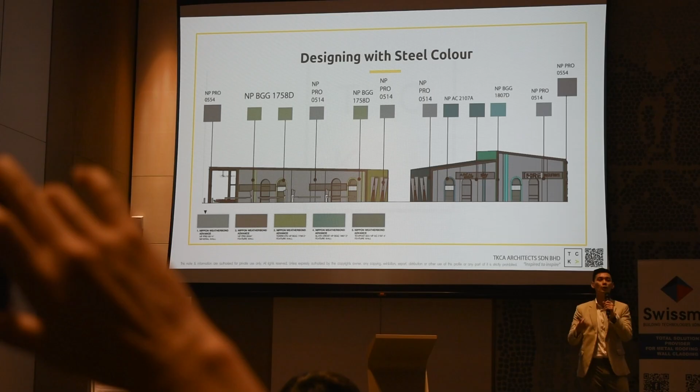So that is one sequence of things we have to consolidate together. So this whole proposal, we not only select the metal roof sheet color, we even have to select all the wall color to match back to the metal color.

I still remember during the COVID time, I asked one of the Swissma team, can you guys move to my office, and then we have to match the actual color with our paint color. So at the end of the day, it looks like one building, one language.

Another thing that we learn from designing with steel - not only on color, but on the texture and on the material. Whether you want to use matte finish, metallic finish, or solid finish.

So this is also one of the things that I think architects have to explore, because when you have different finishing, under the sun it is different compared to indoor. So that is another thing we're actually exploring when we are doing the design.

What kind of calculation? Of course the QS will help you come up with the cost. Just so you know, our original design is made well - I didn't know how much it would cost. I'll just say this profile is nice, I want to use it. But as you can see on the aerial view just now, the whole building is basically clad with our metal deck.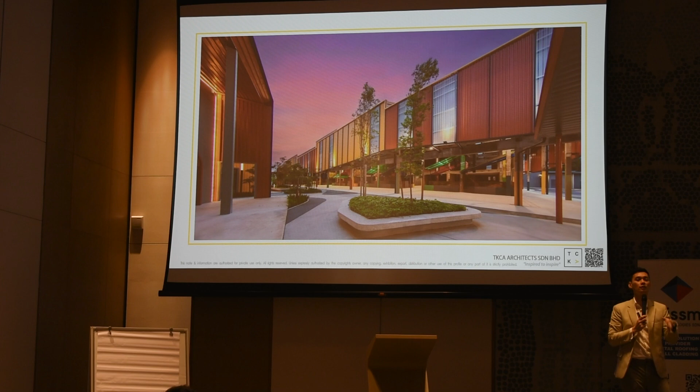So apart from color - you already know color is fixed - what else can we look into? Thickness you can't change because of the durability, because of the structural requirement. So we look into the profile. What kind of profile can we study?

Our building is divided into 2 blocks. One is the market hall here, connected by the linear plaza and retail plaza. Zooming in, you will see our market hall here, which we have to design together with the profile.

Why do I highlight the profile as very important? Do you guys know what is the width of a steel profile when it comes out to the side? I didn't know before I did this project. Whenever I do detail drawing, I just punch H - I don't care what is the width of the steel at all, because I think clip lock can just clip one. But when you are in my time, no budget, then you have to really think of this.

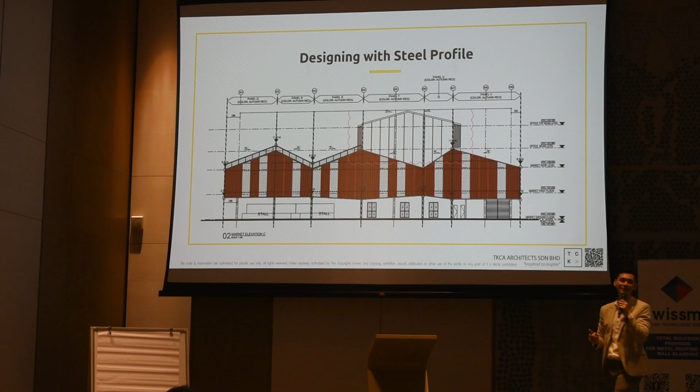How is profile so important? This is one of our projects that we think we really do until the max, with the detail drawing very detailed, even though we are lacking time. Because we want to make sure this design is what we intended, despite we have cost concerns. I think all the projects will have cost concerns. So how can we, as architects, as designers, make it work?

One of the things we have studied with the team is that we have to study the profile. There's so many different suppliers, roll former, so many profiles - how can we select from it? When we started with this project, I only knew 2 types in general - screw fix and clip lock. Then the others are all their product naming.

Do you guys know what kind of profile all this is? So many names. If you are young like me last time, when I just came out, I didn't even work with so many profiles. And then I only had 1 week because the time was so tight to study all these profiles. So what I did is we selected the profile that we wanted, which has a very high rib, yet you can see the effect of the shadow that we wanted.

Second, it won't rust, it has clip lock system. And third, is on the width, which just now Mr. Wong mentioned on the oil canning issue. We want to avoid all this. So how do we study?

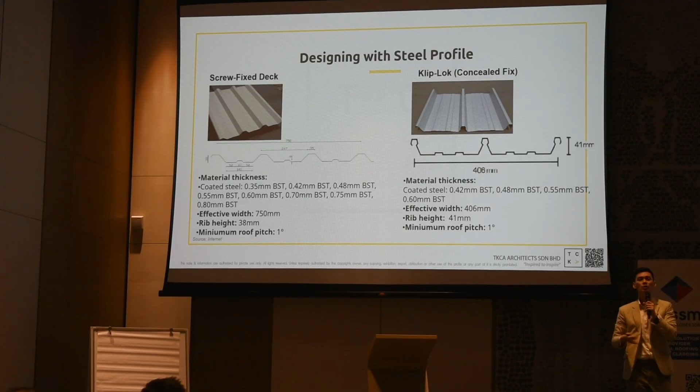There's a lot more things to take into consideration. Apart from preventing it from rusting and making it aesthetically nice, most importantly, my clients always ask me, is your design going to take a very long time to build? 1 year to complete or not? Things like that. So we need to look into an efficient way, not only on the cost.

So when we look into the cost, my client told me, you can't go standing seam. So I said okay fine, then we go all clip lock. Then my QS told me, Ren, clip lock also cannot for all. Then I was like, I'm so sad already, but I still want this project to jalan.

So what we do is, we try to think of, as a visitor, what you will see at the first place. You will normally walk into a building and only see eye level. So what we then do is, all the link retails, because the facades go all the way down to the floor, we only use clip lock from the roof to the wall. So it's like an N shape.

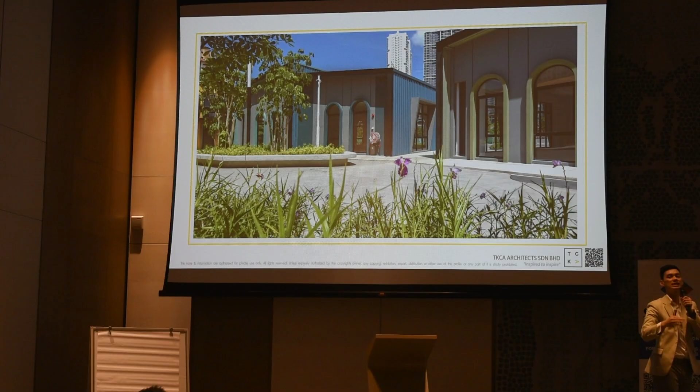Everything is clip lock. On here side, everything is clip lock, so you don't see any screw. Anyone who passes by, they don't see it. So it's seamless. At the same time, you will have the regularity that we wanted.

Then when we look into the details, we need to figure out the installation method. Also very important, because when you apply it on the wall, the termination is very obviously seen by the public. So then we need to look into the profile line to divide them equally to make sure I don't cut extra or I don't cut lesser.

This is the clip-on system that you see. We don't just apply it on the roof, we also apply it on the ceiling. So it becomes an N shape on both sides. We've learned a lot on this.

I always thought the clip-on system, everything is cut in the factory, then they send it here. Only when I did this project, I realized they actually cut on the side for some part of the profile, and the cut is like hand cut. They won't cut straight, they will cut like that. So there's a lot of combination detail that we need to look into whenever we come with this. That's why you will see edging, capping at the corner to hide away the detailing that they don't have.

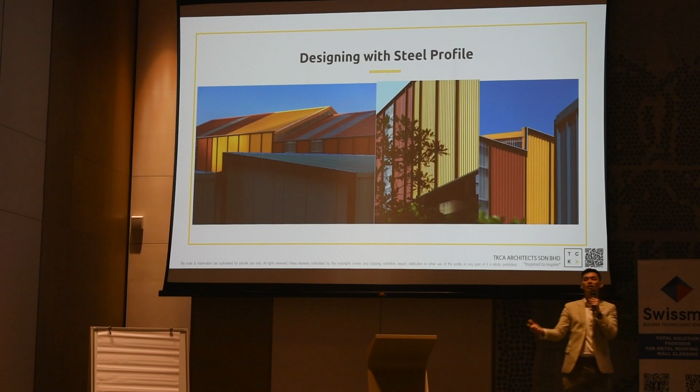The RHS hides the screws you would otherwise see. At the same time, it deepens the layering effect of our facade. When the sun shines, you see the layering part of the building—different colors, different ridge heights, and different layers. That is how we compensate with the screw fix system.

I don't know why my QS tells me this is more affordable than having a screw fix system. Maybe it's because RHS is easier for them to fix.

So by having a metal deck design as a facade, if you just paint on top, outside will look nice. What happened inside? You go in, it looks like a factory, but I'm not designing a factory, I'm designing a commercial area. So what I told our QS is that I must have color on the other side. Then our supplier told me, sorry Ren, if you paint on top, there's no more warranty.

So I don't have this option anymore. What we proposed to our clients is that no matter how, I want color on both sides. So the only way is to install another layer of metal deck. That is why I cannot use Klip-Lok, because of the two sides. So both sides have metal deck—only the roof has only one side. So all the facade have two sides.

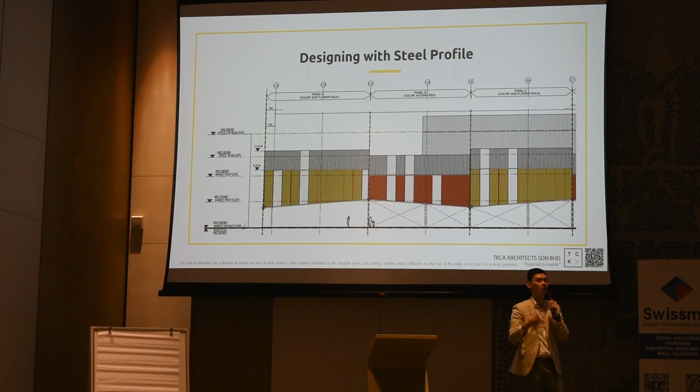Apart from having two sides, we need to look into the light transmission. We need more natural lighting to come in. That is why when we design a transmission panel, we design it together with the roof. We see where the corridor is on the roof, then we open the opening there, and it continues to the facade. All this has to have detailed calculation.

So that is about designing with facade—not only the color, but the width, and the profile selection.

The last thing we look into when we design with steel is always, in Malaysia, you need to think of climate. Just now Mr. Lloyd will tell you the calculation. I know most of my architect friends don't like to count, we just want to make sure it complies.

During my time doing this submission, unfortunately UBBL was already enforced. I must comply to UBBL by-law 38A, particularly in KL. DBKL has this green checklist—you must make sure everything is compliant.

So compliance is easier when you are working with a wall. But how about a roof? Every time if you are ceiling it, it all settles. But when we were designing Sama Square, it's very ventilated, so there's no ceiling at all. We need to look into the whole system.

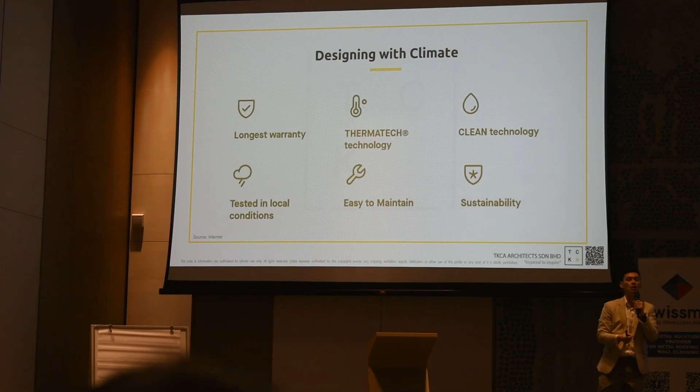Second, we introduce clerestory windows where hot air will rise up through the roof, while at the same time allowing light to come in. We also introduce around five BS fans. If you have time to visit KL, please visit here—we only turn on the BS fans, it's very windy and not hot at all, just like a food court. Because of the very high ceiling and sufficient insulation, we don't have a heaty environment even when having dinner or lunch in our food court area.

Apart from that, when we design the retail village, we wanted to create more of an orchid garden.

So the whole retail village has 4 sets of windows. You might be curious, having this facade, what is it inside? So because of the heat insulation requirement and also because of construction time...

Inside the metal deck is actually brick wall. The metal deck is acting as a facade for us. So by having brick wall, you have sufficient solar heat gain and all that, which makes the whole retail not so hot, because brick is enough for the thermal requirement.

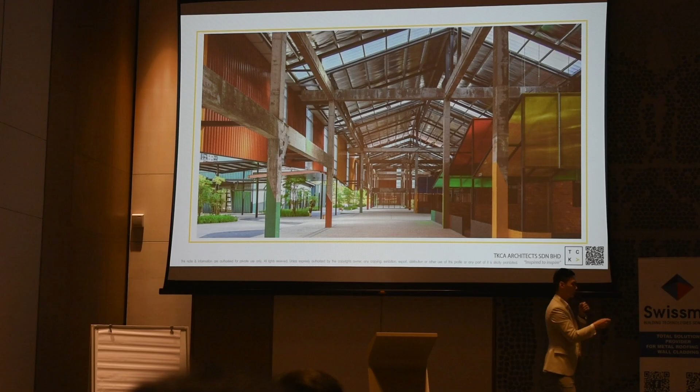So this is the view of inside that I mentioned just now. We told our client we still wanted to have color inside, but you don't see the profile much anymore, because budget is also another constraint that we have.

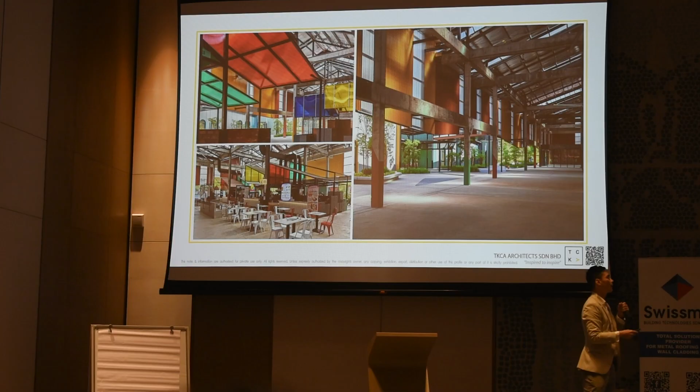But when you are standing inside, the sun doesn't really hit the facade of the internal panel. That is why internally, without any profile, you still see the colors. So when standing inside, at least we don't feel like it's a factory effect, which we don't want. This is after our food court concept came in, which is very rustic and hipster. We want everything to look like one whole development.

What we did is, luckily, you can get this detail from the supplier. They have a specific type of detail on how the installation works. From there you can put it into your construction drawing or even tender drawing to make sure your QS captures this. For this project, I hope the QS - I think QS is here, right?

Won't quarrel with me - I quarrel with my QS a lot, because I keep asking him, is your BQ capturing my facade panel? Is the RHS captured? Are both sides of the thing captured? Because sometimes my drawing captures it but the BQ doesn't. Then when you go to construction site, even though the contract says follow the drawing, the client will say follow the BQ, correct?

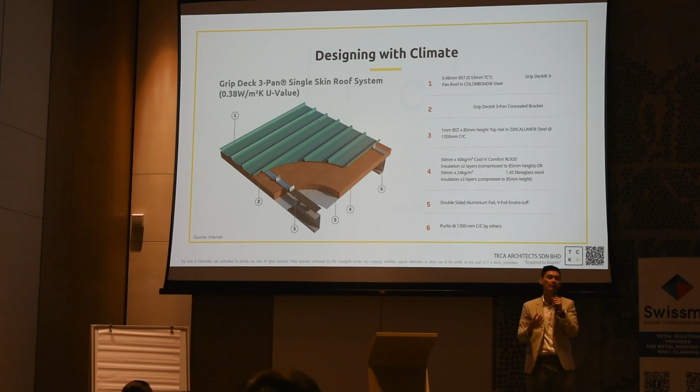So let me play you the final video to end my presentation, to see how we curate the whole space of Sama Square.